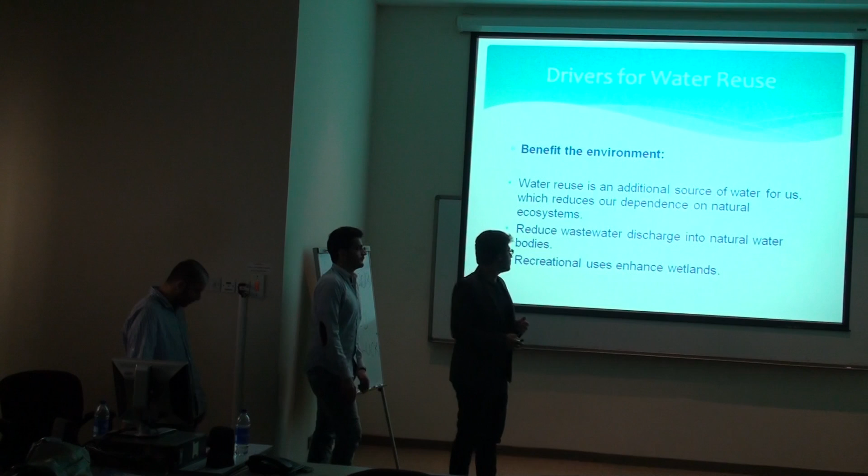Also, as I mentioned before about dumping water back to the ocean or land, when we reuse water we reduce this disposal to the environment. So we are reducing the pollution that goes to the environment through water disposal. It's also worth mentioning there's recreational reuse, like creating lakes and such, which also enhances the environment for us.

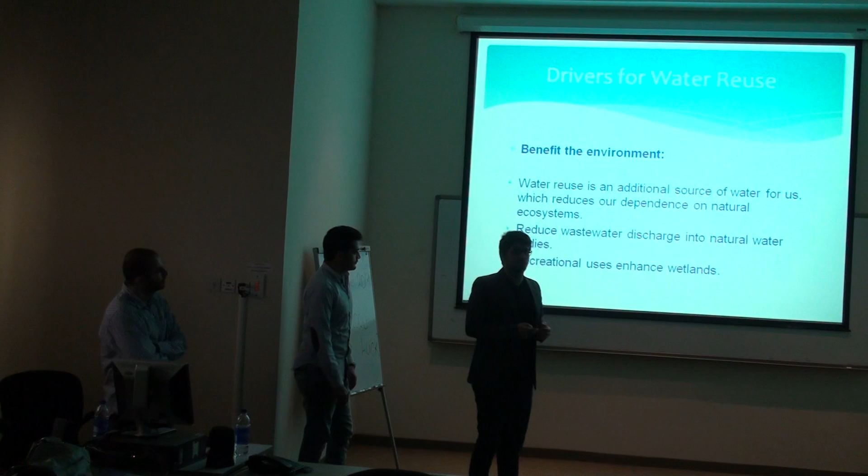Another driver is the economic value of used water. This value depends on where we are using it. The applications my colleagues are going to discuss will show you how the economic value of this water is determined.

Finally, when we reuse water, we reach sustainable development, because the development itself will reuse the water, making it more sustainable. It's better than getting water from different sources and disposing it the same way each time—better to have a small kind of cycle. And now I leave you with Saif Abdelbak to talk about the applications of water reuse.

Okay, my name is Saif, and now we'll start with talking about the applications of water reuse.

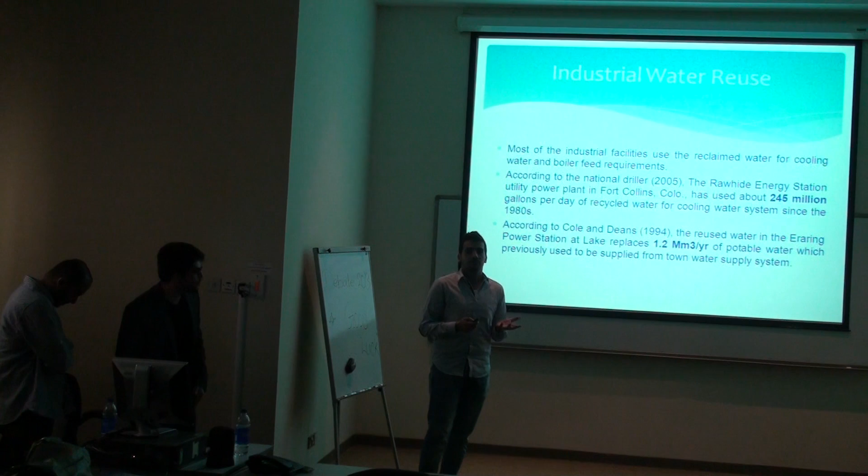Let's start with the first application, which is industrial water reuse. Most industrial facilities consume a lot of water. To overcome the problem of water consumption and scarcity, many industrial plants have decided to reuse wastewater. Basically, they take the wastewater and treat it to make water of good quality. Most of the time they have their own treatment plant next to the industrial facility, where they disinfect the water and make it of good quality.

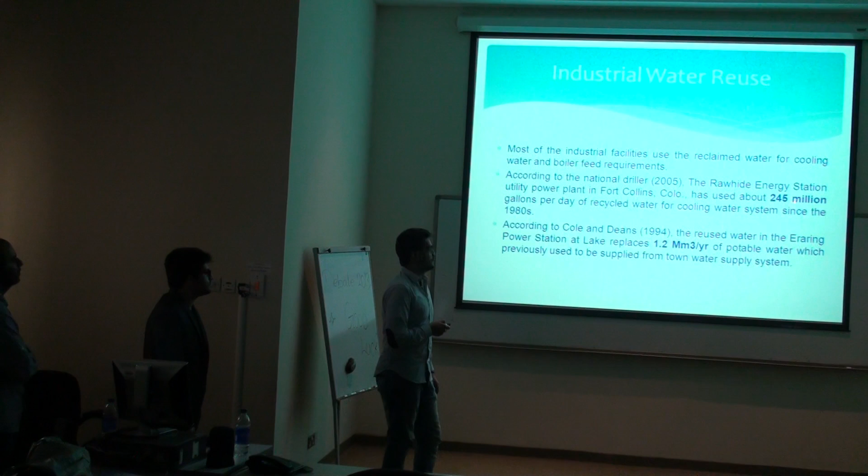Let me give you an idea about the numbers here. This water plant in Fort Collins has used about 245 million gallons per day of recycled water since the 1980s. So that's a lot of water.

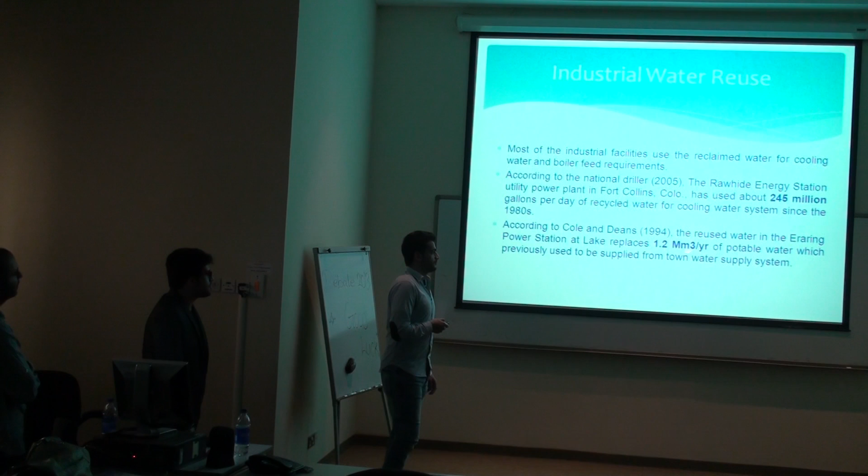And here's another example of a power station plant in Australia. They have used 1.2 million cubic meters of treated wastewater per year in 1994.

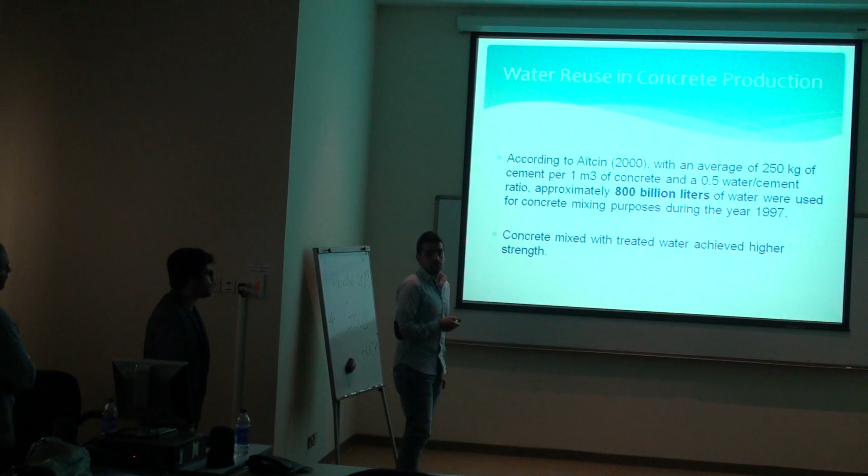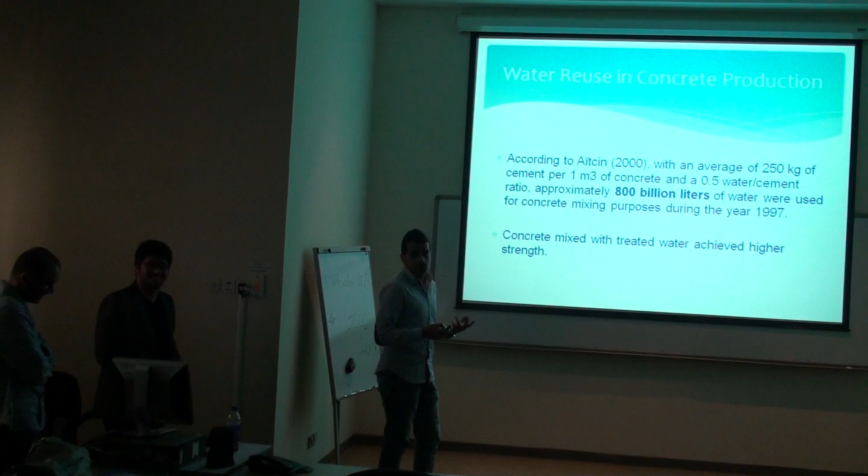The second application of water reuse is concrete mixing. We know that for concrete mixing, most of the time we use potable water to achieve good properties of concrete, but many research studies have been made due to the high consumption of water in concrete mixing. To make normal weight concrete, we have been using 800 billion liters of water during the year 1997. So that's a lot of water.

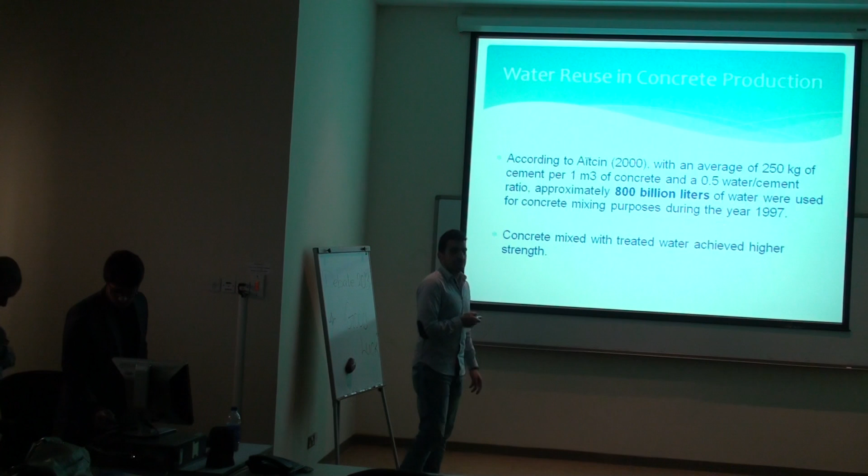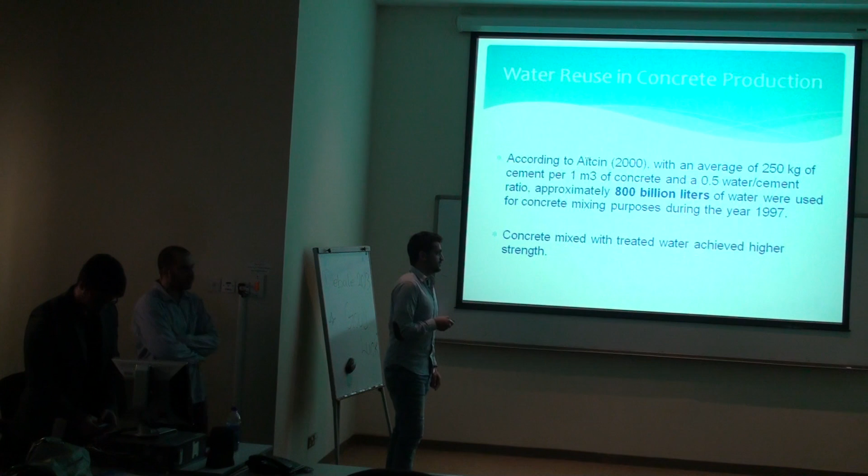So what they have done is take the wastewater, treat it, and use it for concrete mixing. Many studies have shown that concrete mixed with treated water, surprisingly, achieves higher compressive strength than normal concrete. So that's something to consider.

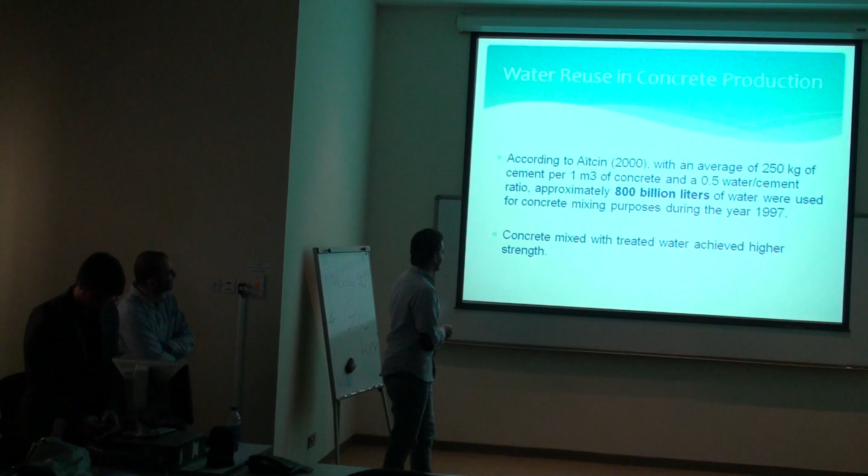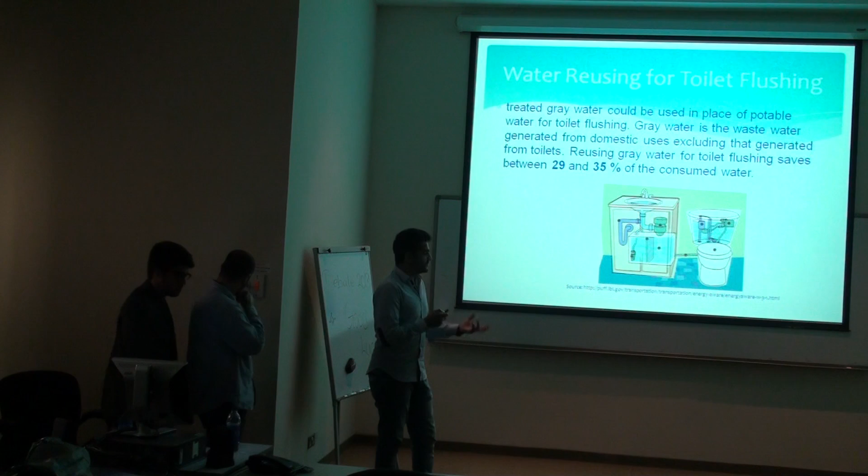Now we can use the water for toilet flushing. Of course, the water used for toilet flushing is grey water. Grey water is water coming from domestic practices, such as washing hands and showering, as you can see here. The problem with this water is that because it comes from different sources, it has different chemical components, so we have to consider knowing all the components present in the water to avoid any health-related issues.

To give an idea about the savings, if you use treated grey water for toilet flushing, it saves between 29 and 35% of the consumed water.

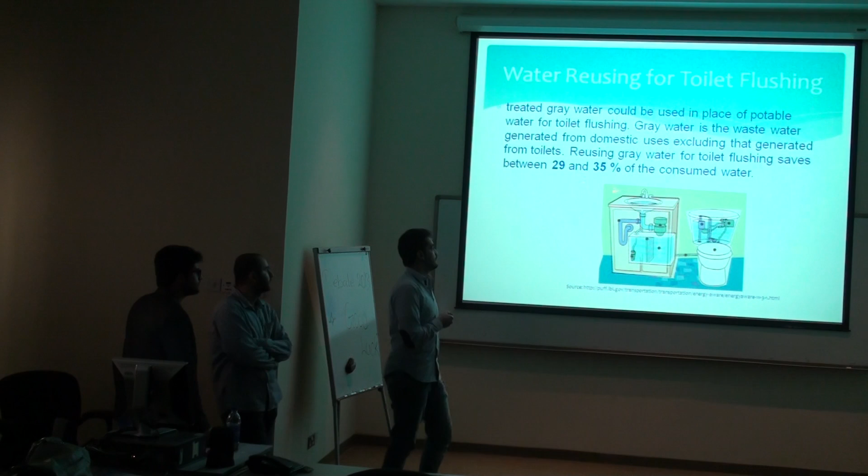Good morning. Another benefit of treated wastewater is agricultural irrigation. As we know, the demand for fresh water is increasing as the population increases, and sometimes the demand can exceed the supply of fresh water. So recycled water can be used as a alternative source for irrigation, reducing the pressure on surface water resources and the depletion of groundwater.

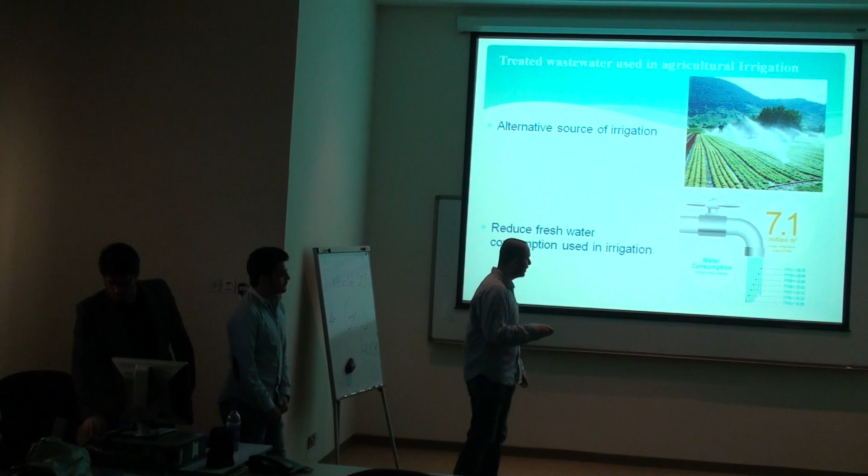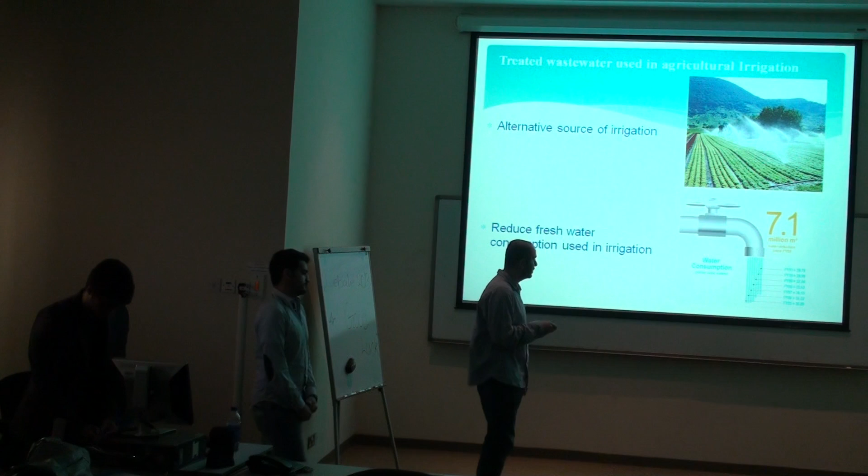Also, treated wastewater is used in agricultural irrigation because of its economic value. Recycled water has a lot of minerals like phosphorus and nitrogen, which can be used as fertilizers for crops and plants. Because of this, recycled water is better for irrigation than tap water, since it has a lower amount of chlorine that might be harmful for crops and plants.

Recycled water also reduces energy requirements and cost. Extracting water and transporting it usually requires a lot of cost and energy. For example, using river water requires a lot of transportation cost to supply it to the farm or irrigation field, since we are transporting it from the source location to the field. Also, pumping groundwater up requires a lot of energy and resources.

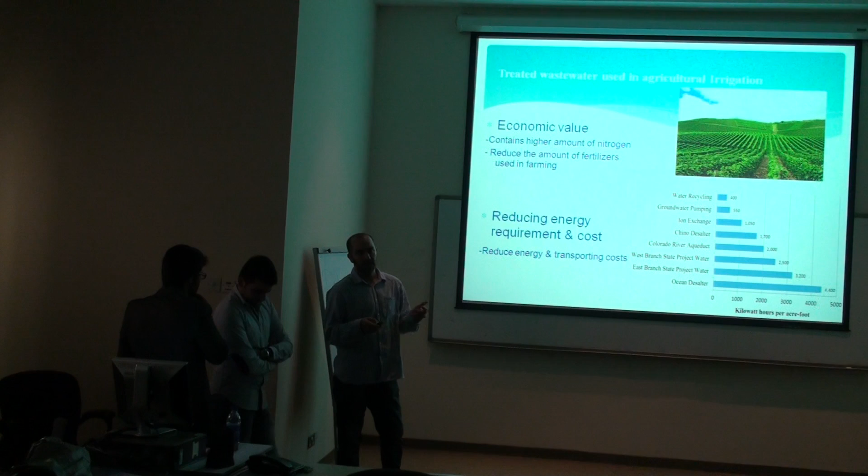Compared with that, recycled water has the least amount of cost, transportation cost, and energy, because it's water we already have, and we're just recycling it and using it again in the same location.

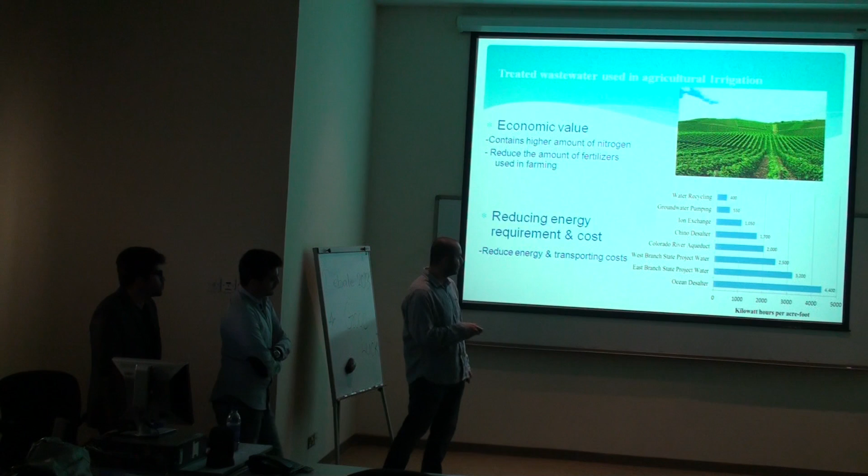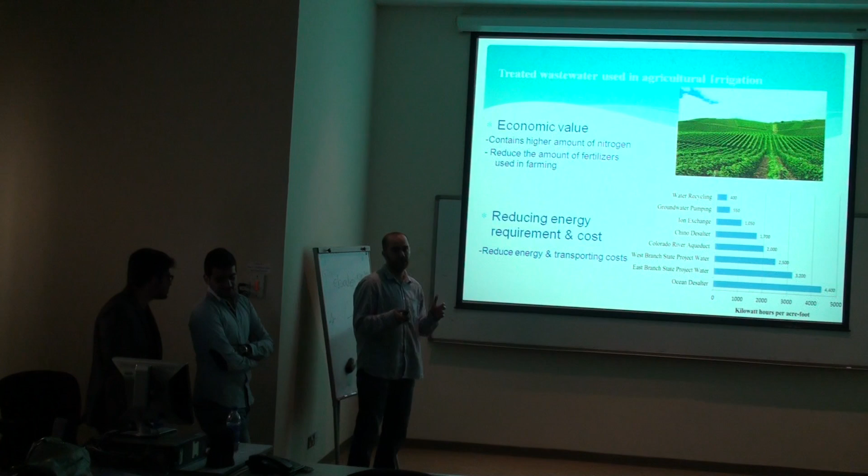This diagram shows the energy required to provide different kinds of water to the irrigation field. For example, desalinated ocean water would require 4,400 kilowatt hours per acre-foot of energy, while recycled water requires just 400 kilowatt hours per acre-foot. It's a huge difference between them, which means we are saving a lot of energy.

The last application of reused water is groundwater recharge. Recycled water is used effectively to replenish and recharge groundwater basins and aquifers using two methods: the first is surface spreading, and the second is injection of water through wells and barriers. Because of the uncertainty of future water availability and the lack of water during drought seasons, recycled water is considered a vital source for groundwater recharge.

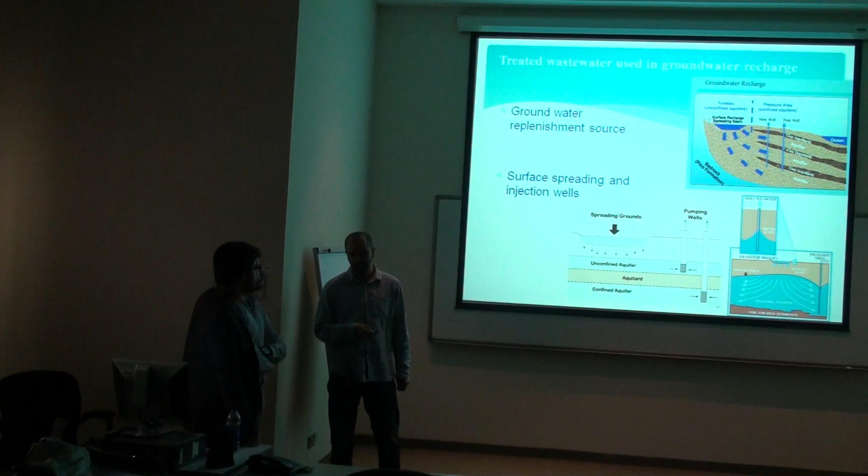Finally, we conclude that recycling water is a good step ahead in creating a sustainable environment and meeting the increasing demand for water. That's it. Any questions? Thank you, everyone.

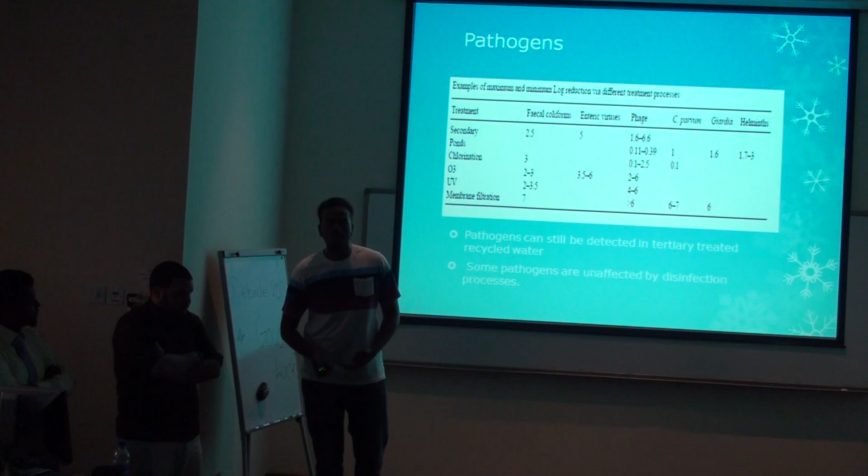This table shows the percentage reduction, the maximum and minimum log reduction, in different types of bacteria and helminths according to different treatment processes. So you have secondary treatment, ponds, chlorination, O3, and UV, which are considered tertiary treatment processes. As you can see, there are different percentages of reduction, and what we can extract from this table is that pathogens can still be detected in tertiary treated recycled water.

For example, UV removes only 4 to 6% of phage, and also there are low numbers such as chlorination, which removes only 0.1% of C. parvum. So what you can extract is that some pathogens are almost unaffected by disinfection processes. This is very important when talking about reuse of water, because if you still have some pathogens or waterborne agents, it's very risky to use that water.

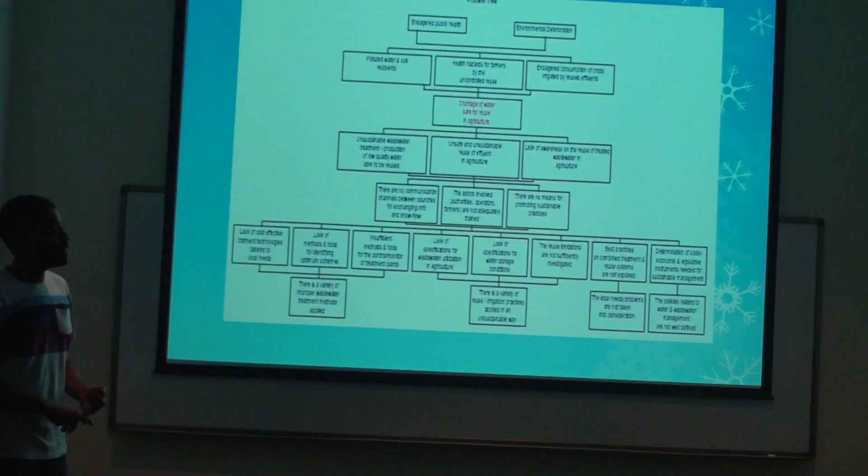Now I'm going to talk about the quality and problems associated with water reuse. Of course, the main two concerns are endangered public health and environmental deterioration associated with water reuse. These are caused by polluted water and soil recipients, health hazards for farmers from the uncontrolled reuse of treated water, and also endangered consumption of crops irrigated by reused effluents.

A lot of reused water is used for agricultural purposes and irrigation, but in fact there are no standards to ensure that the water used is eligible for irrigation and agricultural purposes. And as we all know, that's a risk not only to the environment but also to the people who consume the crops watered by reused or treated water. If the treated water doesn't have the proper quality, that's a major health risk.

This tree shows the different problems associated with the shortage of water that's safe for reuse in agriculture, for example unsustainable wastewater treatment and production of low quality water able to be reused. In fact, a lot of studies show that most of the water that is reused and treated for agriculture is of very low quality. Also there's unsafe and unsustainable reuse of effluent in agriculture, lack of awareness on the reuse of treated wastewater in agriculture, and many more problems.

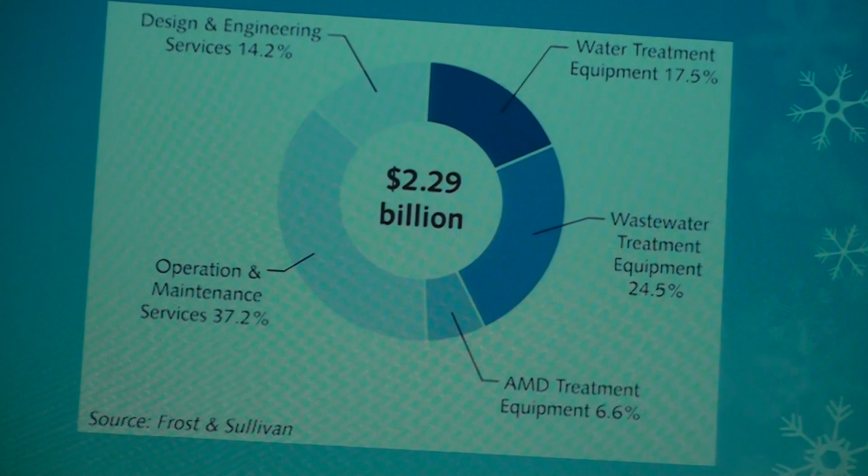Hello everyone. They didn't go deep into the cost of treatment because it's too much to construct a treatment plant and a distribution system. First, you need to construct a piping system from the properties to the distribution and treatment plant, which until now we didn't construct. They also have to separate the gray water from the black water, so this will cost them piping for both. Moreover, they will have to construct the treatment plant, which this graph shows costs $2.29 billion.

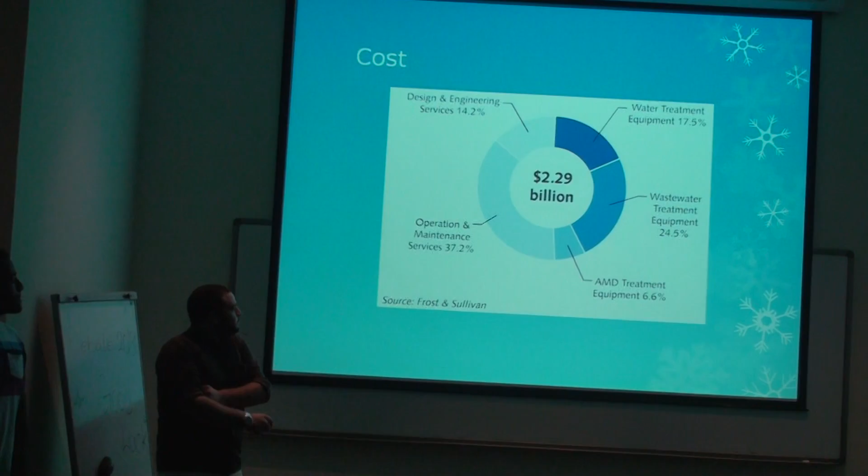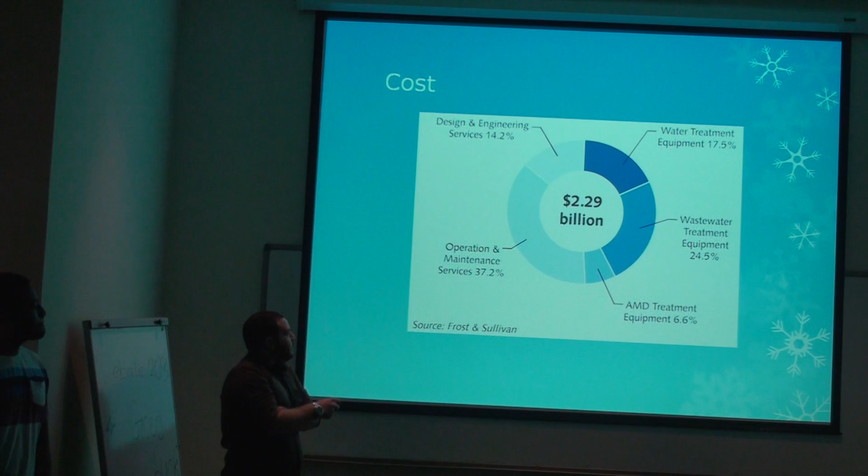37.2% is the operation and maintenance, which is annual. The equipment costs 17.5%. The design and engineering services are 14.2%, and the wastewater treatment equipment is 24.5%.

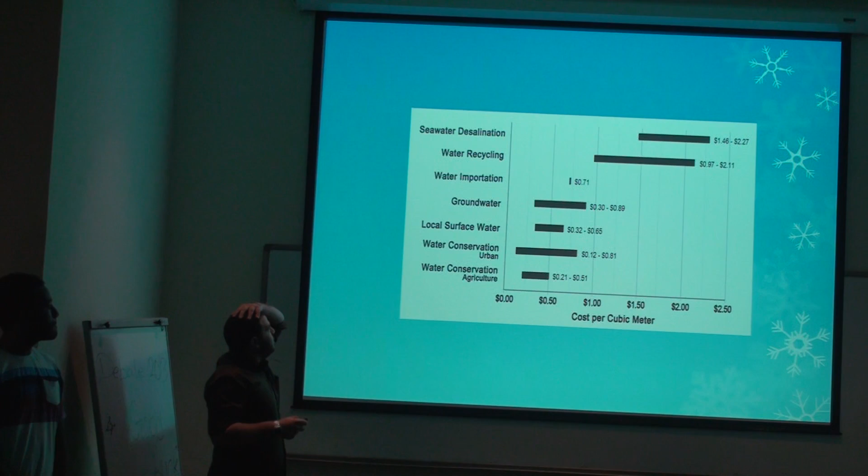This graph shows the cost per cubic meter for desalination and water recycling, because here in the UAE the most used methods are desalinated water and recycled water. If we are already desalinating the water, it costs us $2.27 per cubic meter. We add over it $2.1 for recycling it, which is too much.

Also, this is of course without the piping system of the network. If we add the piping system, that will cost triple or maybe ten times the cost of this one. We didn't add the cost the government will have to pass on in the water bills, and they will have to give more enhanced and advanced regulations that must be very strong so that people will believe in them and drink and use treated water.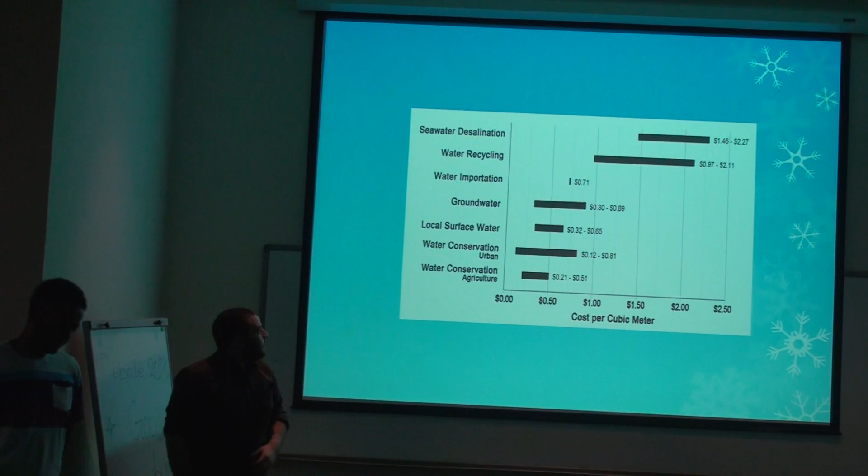Here it shows that the piping system was not mentioned in the cost graphs.

When we were doing our project, we did a survey here at AUS in the library among 18 students. We asked them, would you drink wastewater that has been treated? 13 of them answered no, and 5 of them answered yes.

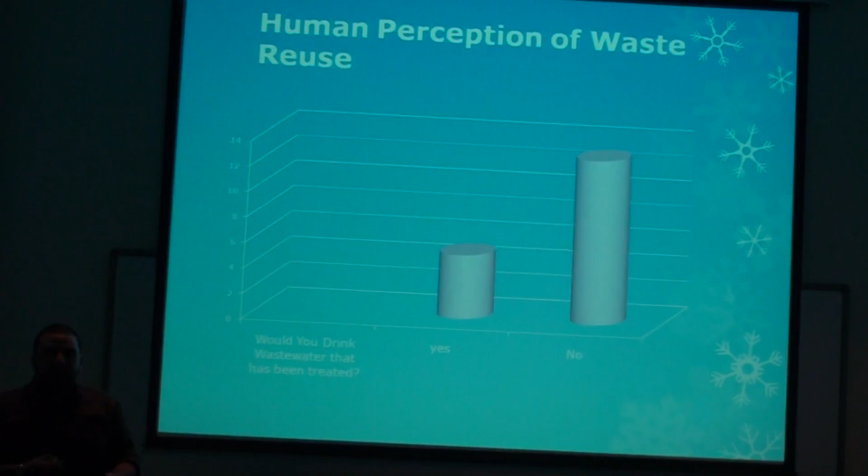The people who answered yes, their reasons were that there are people who have no water to drink, like in Africa, but also these people don't have the money to construct a treatment plant. So in some African or undeveloped countries, they drink untreated water because they can't afford to build a treatment plant.

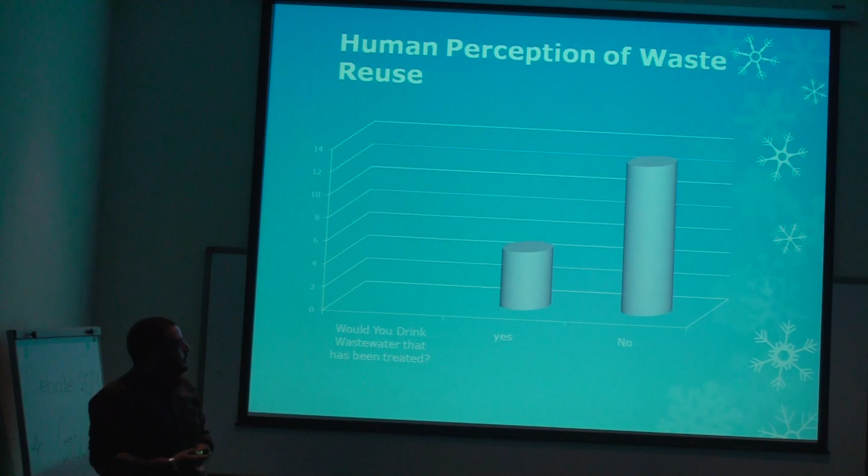Here, my favorite part is the human perception, which is based on the answers of the students, that if the government wants to convince people to drink wastewater, they have to put regulations in place that maintain and give them clean wastewater.

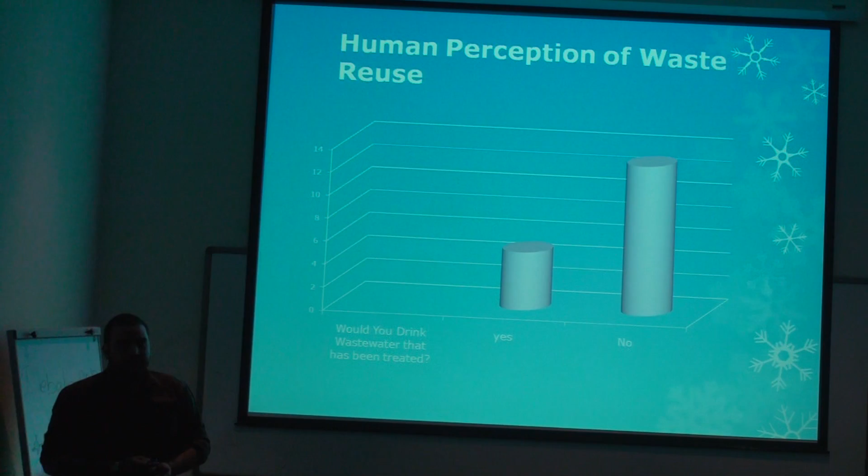Now I'll leave the floor for Ahmed.

So we cannot say to basically not reuse water, because it's already implemented nowadays and is one of the most feasible advantages of treatment. But we came up with an alternative to reuse, which is reduce. We can reduce the amount of water we use, as most water pollution comes from abusing water.

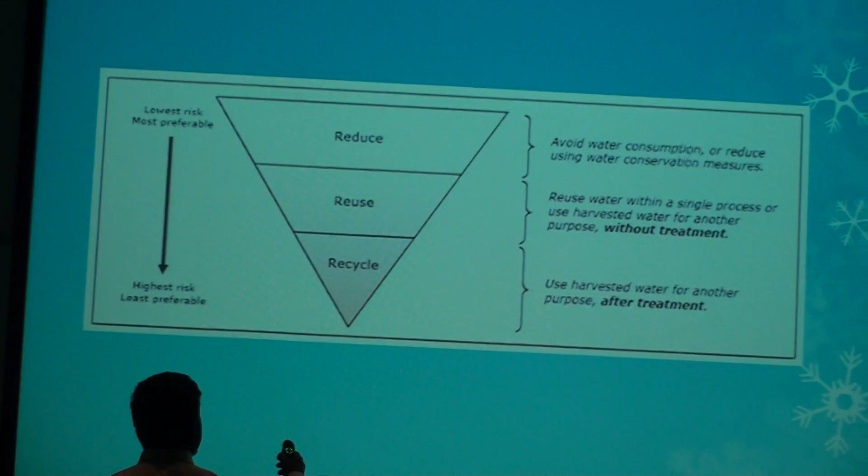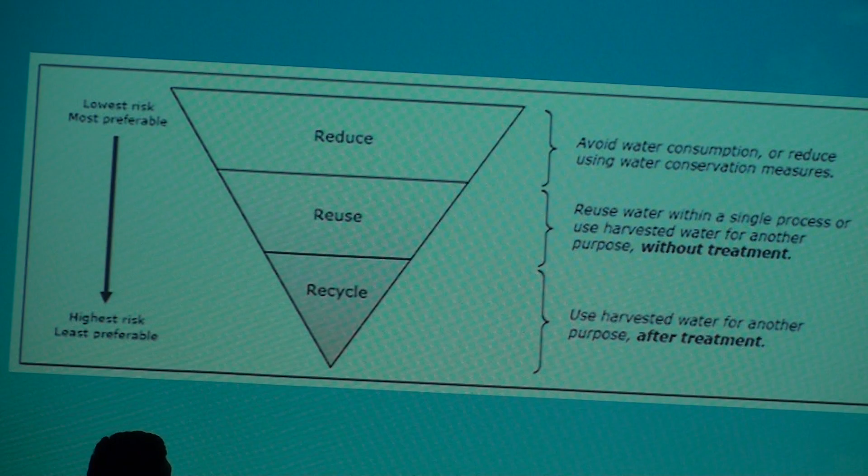If you look at this graph, this hierarchy chart shows us that the first thing we have to do is reduce, then reuse, then recycle. Recycle is the least preferable, while reduce is most preferable. If you read that, reduce means you avoid water consumption or reduce it using water conservation measures. Reuse means reusing water within a single process or using harvested water for another purpose without treatment. Recycle means using harvested water for another purpose after treatment.

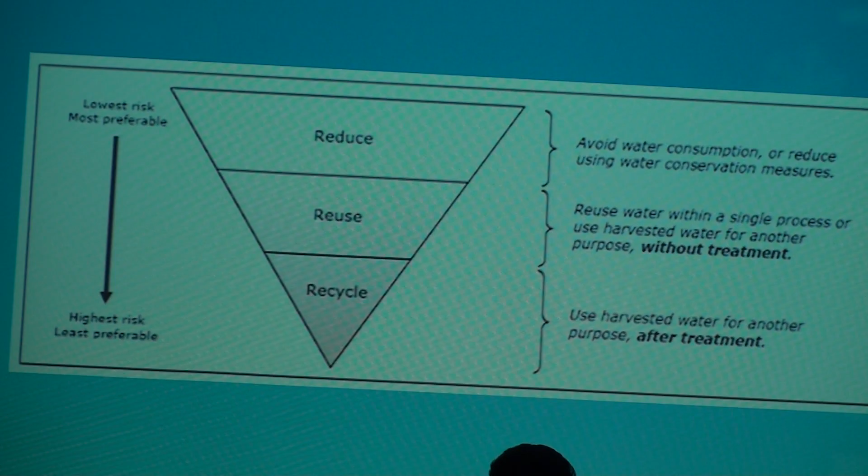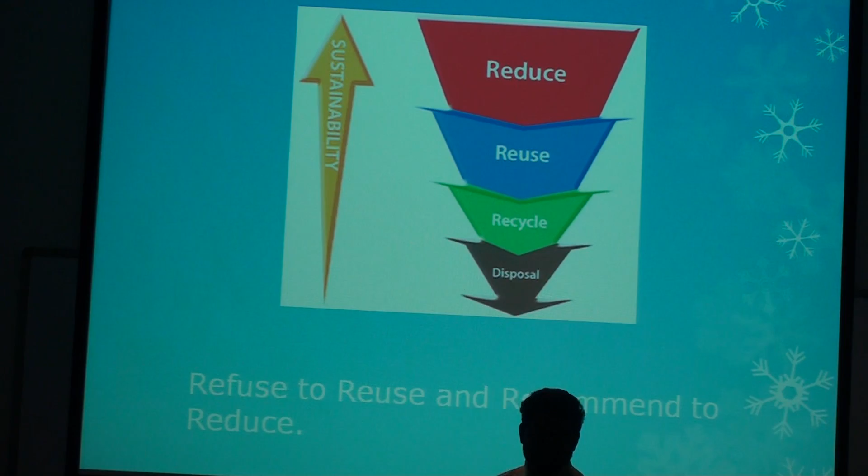If you see the sustainability chart, the most sustainable approach is to reduce, then reuse, recycle, and dispose. We came up with this phrase: refuse to reuse, and recommend to reduce. And with that, we conclude our presentation. If you guys have any questions, we have time.

So, what would you like to say? Would you like to start, or shall? So what's your first problem? Tell me, discuss it. What's your first problem? Okay, can you repeat? Let's start with something at least. What's your first? What are you?

The first problem, the main concern is the health risk associated with the water we use. And you didn't mention anything about the quality of the wastewater after treatment.

We want to talk about technical stuff. We will talk, we didn't talk yet. No, but this is a very technical topic. Do you want to respond on the point that you didn't take into consideration the pathogens, disease-causing bacteria?

Can you give me an example of a case where someone got a disease from a developed country who followed the regulations of water reusing? Can you give me an example?

There are many cases. In our countries, for example, in the Middle East, in the Mediterranean region, there are many cases of people getting sickness and diseases associated with consuming crops. And as you know, in Africa, it's a huge crop land.